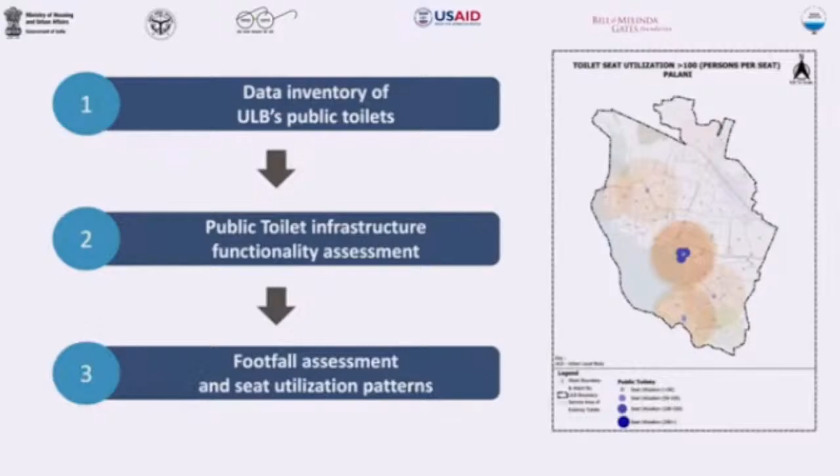Seasons. By additionally geolocating high-activity areas and open urination or defecation spots, new interventions are pinpointed. Finally, citizen validation surveys authenticate proposals to ensure that public toilets are available when and where people need them.

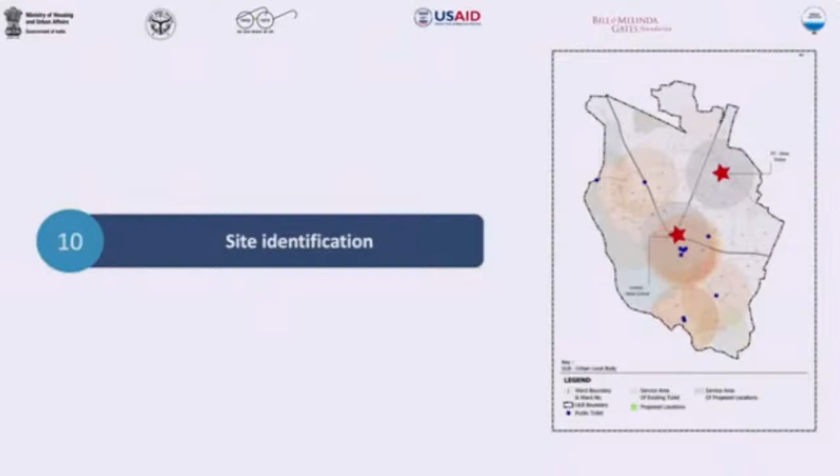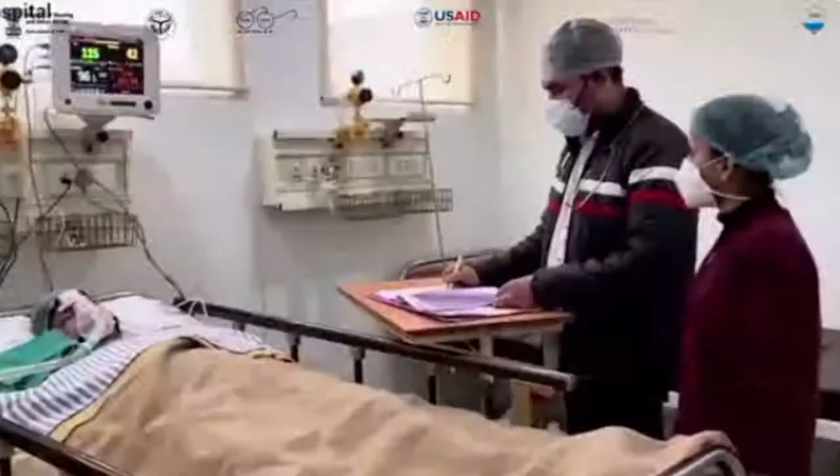Shanti commutes to work by bus, switching at 2 points along her 1-hour journey. Heavy rains worsen her trip, but even on her period, stopping to use a restroom isn't an option. Finding a clean toilet requires a 10-minute detour, risking her chance to catch the connecting bus. Last year, Shanti contracted a urinary tract infection, like countless others who hold in their pee.

Though public toilets have been built in large numbers under the Swachh Bharat mission, ULBs treat their daily maintenance as an afterthought. Supported by BMGF and USAID, WASH Institute has developed a toolkit to streamline public toilet monitoring. Using this toolkit, states can assess public toilets based on functionality, accessibility, cleanliness, eco-friendliness, and safety. Toilets receive a revisable rating, and a dashboard mechanism allows ULBs to monitor them at scale and plan interventions. Public feedback reinforces this process, making ULBs accountable for clean and functional toilet infrastructure.

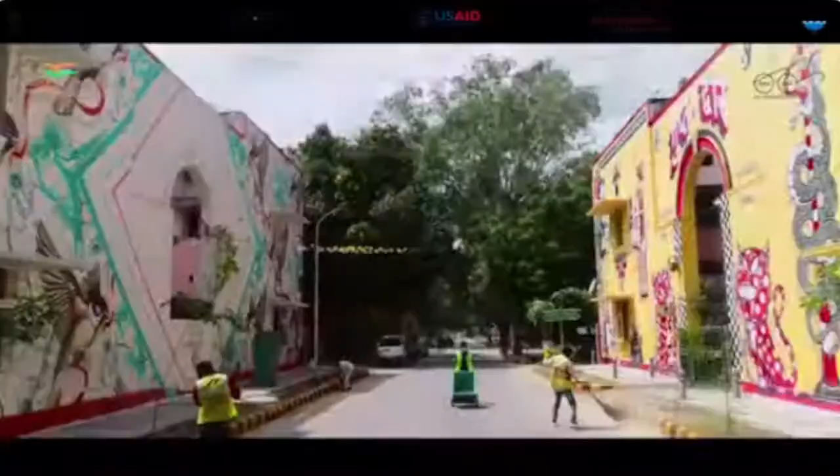In the afternoon session, we move on to session 6, Technology Selection and Treatment Standards. To begin, I first invite our speakers onto the dais.

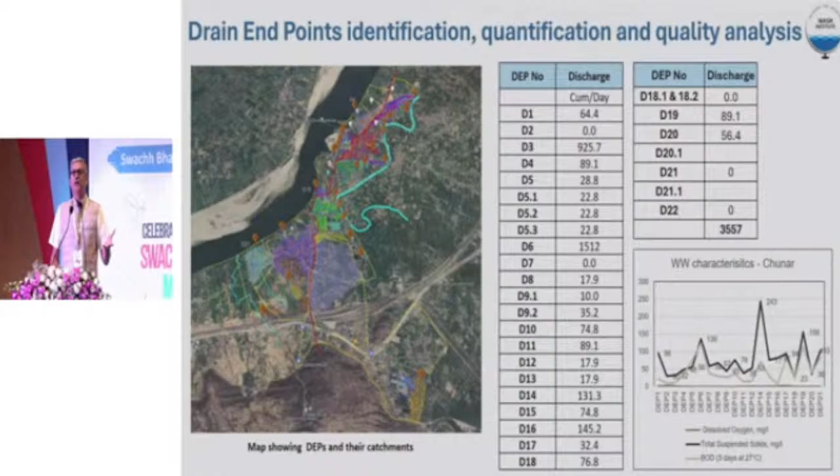But at the end of the day, if you see on an average, from BOD point of view, it is less than 100. In only one of the places it is more than 100; if not, it ranges from 50 to 100. So this is one of the key lessons one has to learn, because most of the time in the morning it was also said that we are designing it for more than 200 or 300 BOD, which is not required.

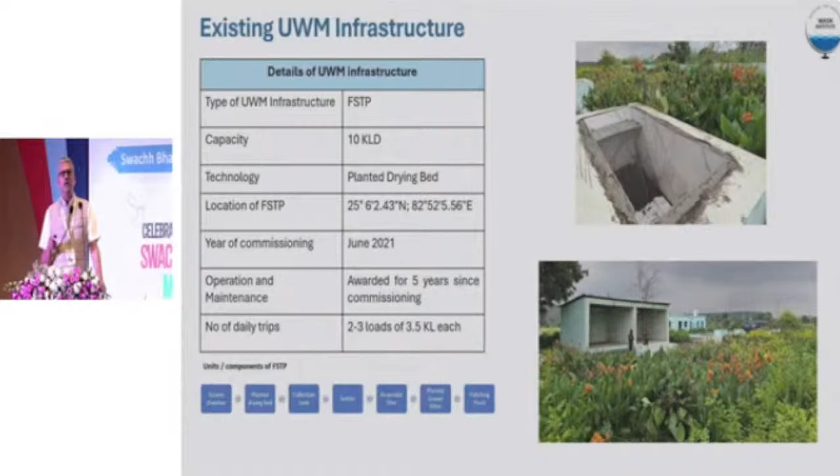Other than that, they had an UWM infrastructure, which was also discussed in the morning. There was one FSTP available with 10,000 liters capacity per day. From the data collected, what we saw was out of 3,800 KLD, or 3.8 MLD of wastewater generated, 3.74 MLD was actually discharged into the drains.

Which means at this point of time, the main intervention is how do you manage the wastewater flowing in the drain. So again, this helps us understand what infrastructures are available, what improvements are required, and what project intervention can be taken up. This helps systematically lead to the solutioning.

The next part, once we knew this, we also checked the risk. This is one of the very important points I wanted to show you, which also helps you select either a sewer system or a decentralized and on-site system. This framework helped us analyze the risk of UWM practice in respective towns.

As we said, in Chunar more than 95% of households got water supply through a pipe. More than 95% of people discharge their wastewater from the septic tank into the drain, and grey water also, more than 98%, goes into the drains, which means water getting into the ground and contaminating the water source is very less.

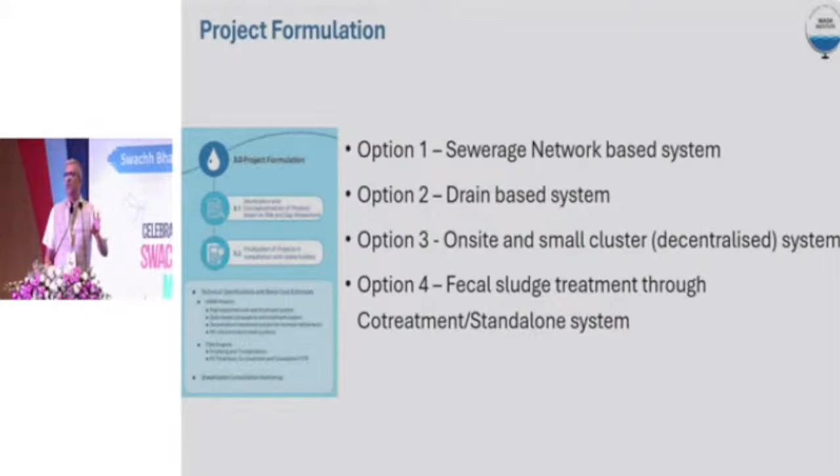Any time we want to talk about used water management, there are four types of solutions: a pipe network, drain-based on-site or small decentralized system, co-treatment of fecal sludge in existing STP or a proposed STP, and a fecal sludge treatment plant. We have to see how these four types of solutions can be integrated within the city's problem. That is what was being tried with this particular method.

So we conducted the detailed topo survey, which is one of the very important parts of the planning process. One should definitely have it, which helps you, especially if you are going with the sewer network or the drain-based network—this is a very essential component. When we did the survey, it was not only the road survey, but also the drain survey. We identified systematically where land is available and to what extent, and also surveyed the water bodies. So these four data sets were collected as part of the data collection.

Once we collected the data, using the topographic data we started working on the planning, where we designed very clearly for a sewer network and checked how much that would cost. From our intervention, there was no requirement for a sewer system, but as an exercise we wanted to compare the sewer system versus the drain-based system and how much each would cost. For that reason, we designed it.

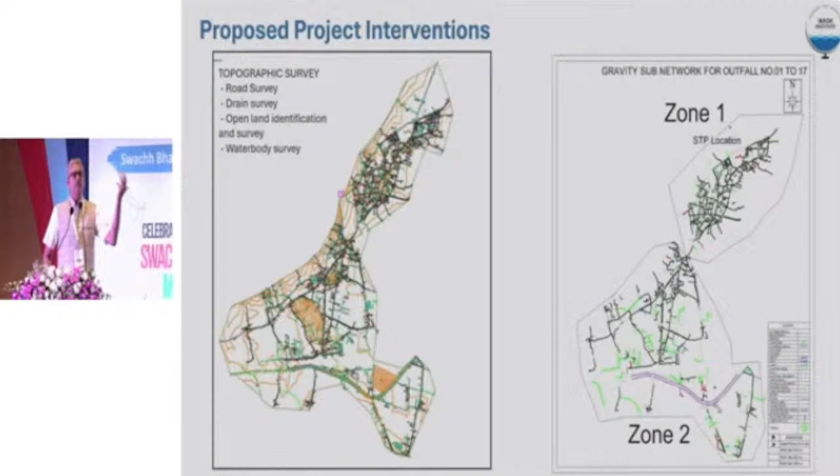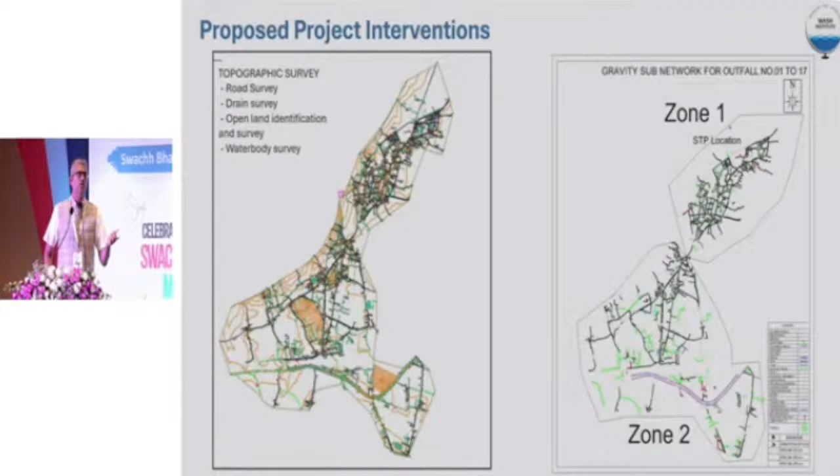But at the same time, comprehensive planning is required for future expansion, because at this point with the resources available, we may go only with an I&D system, but whatever infrastructure you provide for an I&D system today should be usable in the future also. Keeping that in mind, we designed this.

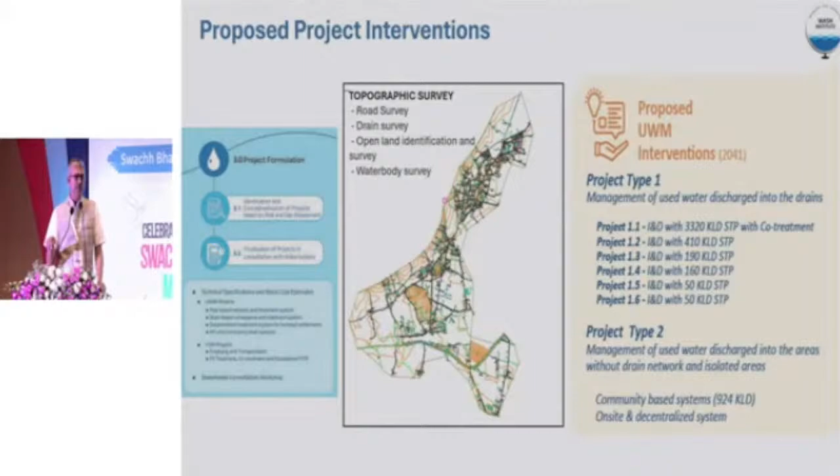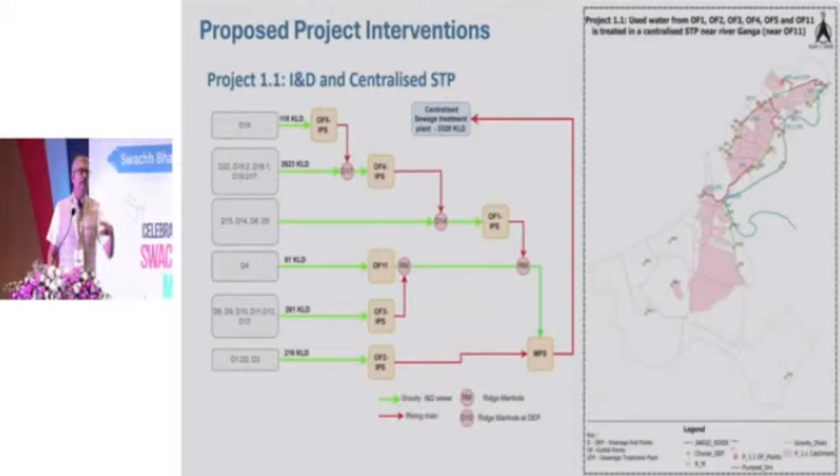These are some of the projects identified across these 22 drains, which were systematically connected. If you see the map with the shaded area, these are where the drains are, systematically connected using the I&D trunk network. The trunk network we designed was part of the sewer network design I showed earlier. So tomorrow, if the city wants to expand, if they have additional resources, they could also provide the pipe in this area.

Wherever we have provided the STP, there we have considered co-treatment. At this point of time, the city has an FSTP and their present demand is met, but for future demand, they have to provide a provision within the STP for co-treatment.

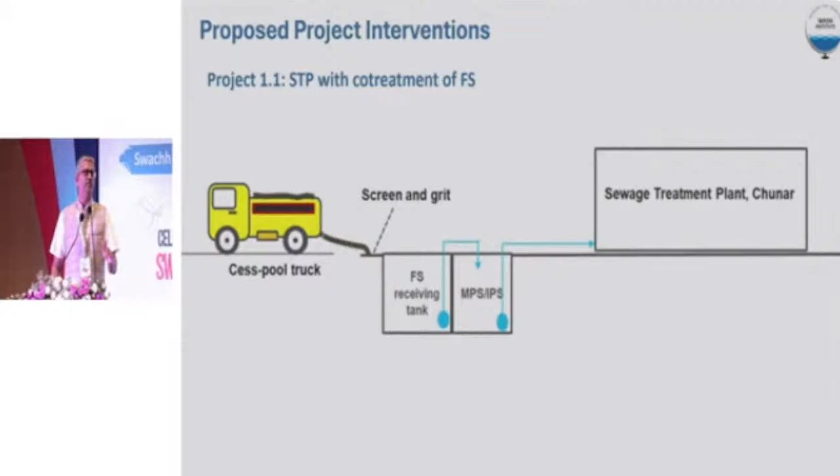For the open areas, there are many areas within the town which are under development now, or fringe areas. There we are proposing a decentralized system or cluster-based system. This has to be very local and site-specific, because we cannot pinpoint it at this point of time. It needs a detailed local survey, and then we decide which can be a small decentralized wastewater treatment system, or community-based pits like a leach pit or soak pit, or other on-site systems that are proposed.

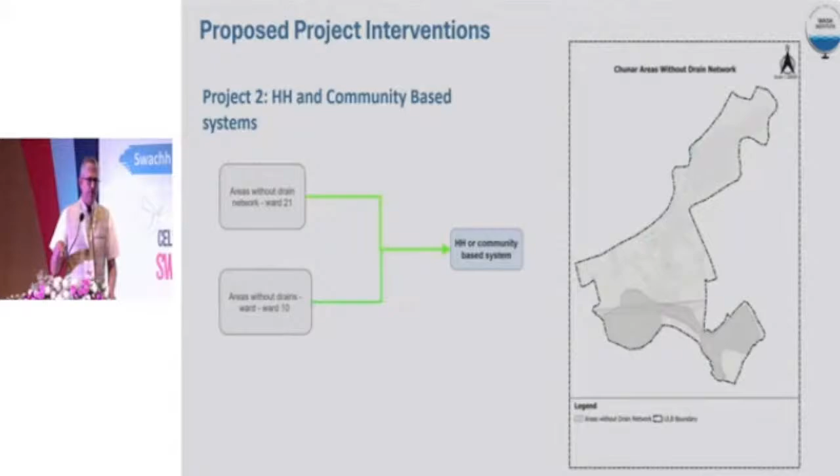Overall, these are the components of the different projects under the main project. As I said, the first project was a drain-based solution. Under that, we have listed 6 projects. The first one was the real project, where we have pipelines connected to a centralized STP. All the others are decentralized STPs, because there are small drains going here and there with a very small amount of wastewater, which we didn't want to divert elsewhere. We wanted to treat it there only.

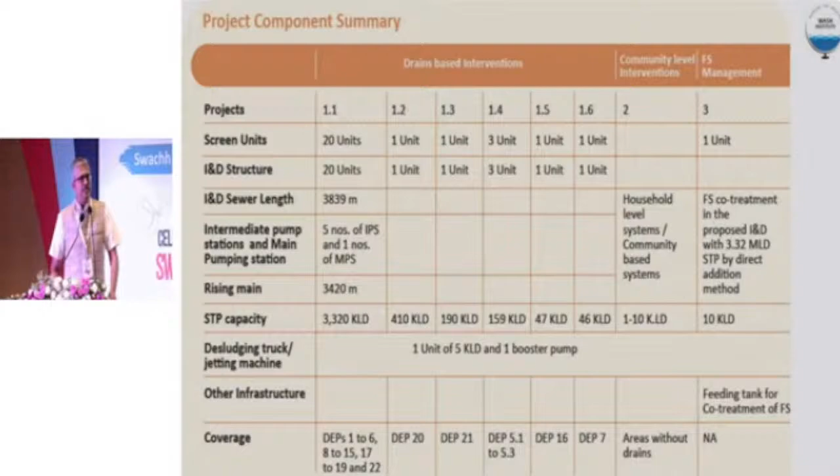Along with that, as we said, the planning process is in place, but at the end, one also needs to select the technology. So we have created a pool of technology options, as one of my other panelists will also talk about, for nature-based systems, on-site systems, and conventional systems.

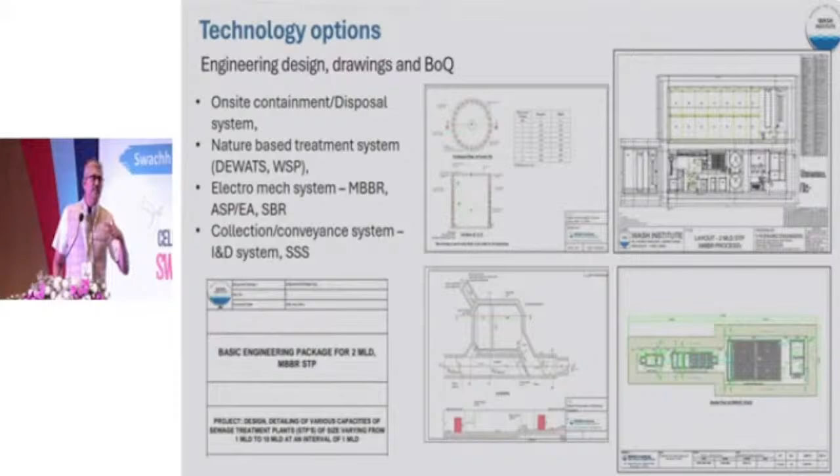For different capacities, the technical options with detailed design, description, cost, and bill of quantities have been developed so that the city can also use it. They don't have to develop it from scratch. They can use it and see how it can be adapted for the local situation there.

From experience, we have also developed detailed training modules, which are e-learning modules, more than 38 for each component. For example, if one wants to learn how to measure wastewater in the drain, we have developed a video-based module which helps the towns do that exercise. Likewise, around 38 e-learning modules of different components of the planning process are available, and we are happy to share them; it is already available on the website.

Other than that, physical training modules are also available. These are the annexures. For doing each exercise, we have annexures and tools available, either a digital tool or a survey-based tool, which can also be used.

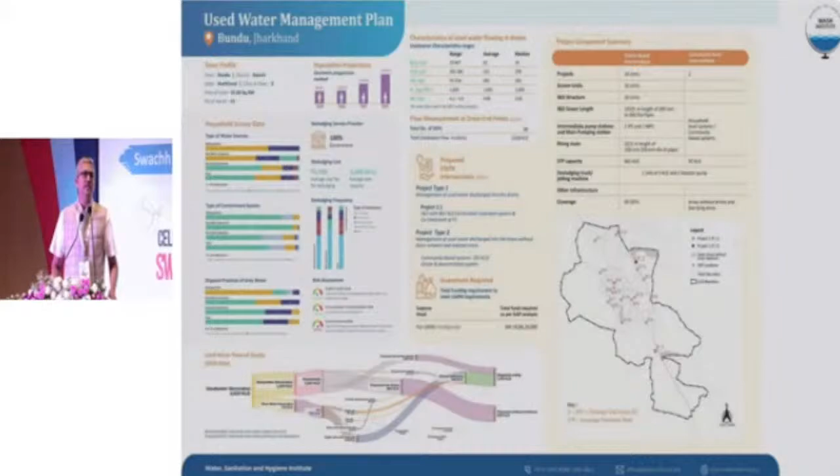Similar to this, there are two other towns we worked on. I'm not going to talk about those; they have been exhibited in the exhibition hall. You may please visit there to get all the information related to the other two towns. Out of 9 towns, 4 have been exhibited in the exhibition area. I was talking only about the town of Shunar. Thank you very much.

At the same time, whatever methodology I have described, we have also developed a small booklet. All of you can use this, which will guide you to prepare your used water management plan. We are happy to share it with you all. Thank you very much.

Thank you, Rajesh ji. So in the morning session you saw one model DPR based on analysis from Chhattisgarh. This is another example, and as JS mentioned, we will collect all these things on a knowledge platform so that each one of you can get all information at a single point. With this, these training modules and whatever they have prepared will also be connected so that you take maximum benefit of it.

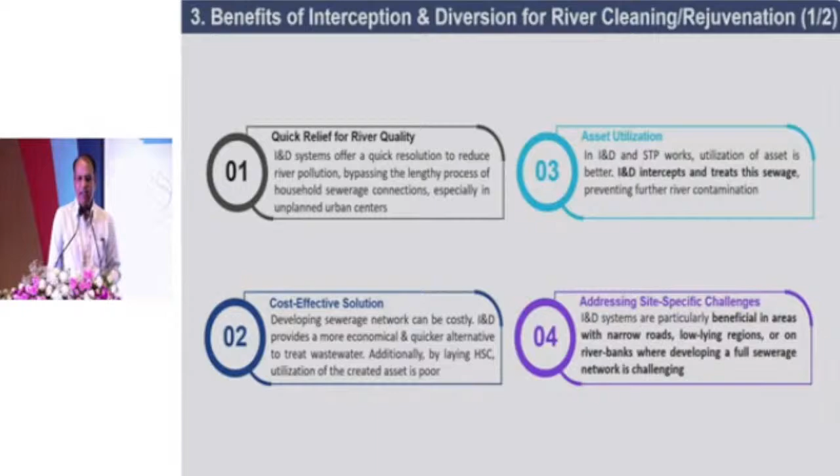Coming to what are the benefits? As I said in the beginning, every system has its own merits and demerits, but there are certain advantages, and that's why I think when the group of secretaries were drafting the framework of Namami Gange, they chose I&D and STPs.

The first is quick relief, because you require minimum interventions. You just have to tap the drains. It's cost effective - Rajesh was trying to share the data on how much expenditure would be required if we go for a sewerage network.

The third is asset utilization. It's not that in Namami Gange we are not doing sewer network projects - we have about 40 odd projects with sewer networks. And this is our experience: the asset utilization is probably 20 to 30%. Even after 4 or 5 years of STP construction, the asset utilization doesn't improve because of house service connections and other issues.

This is totally reverse in I&D. Probably on day one, you'll get 70% asset utilization.

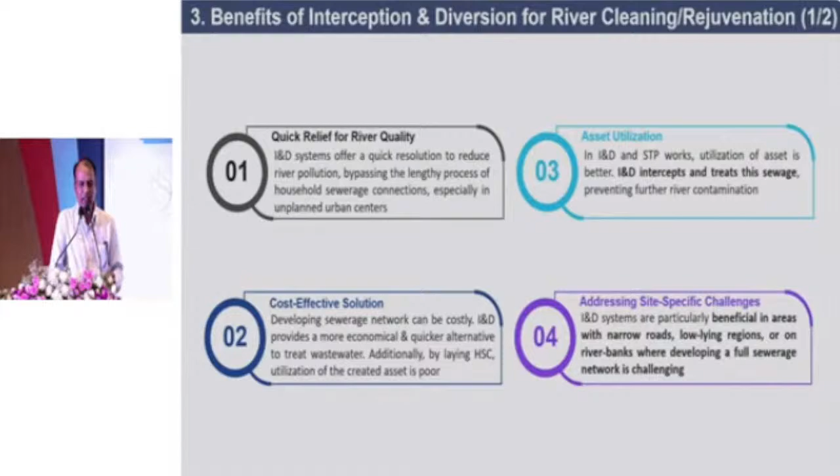Site-specific challenges, of course - whenever you have to lay sewer lines, in urbanized areas what type of challenges do we face? There are certain historical old towns where we don't need sewer networks, because if we see the boundary, the road is hardly 2 to 2.5 meters. We have such experience in some towns of UP and in some old towns of West Bengal also.

Sure, like old Dutch colonies from that time, so we don't have space to lay the network in those areas. The other thing is prevention of solid waste - not that the entire city's solid waste, but whatever floatables and other things are going through the drains to the river, with a better I&D system we'll have proper screening and other mechanisms.

They'll keep saying this nala is still flowing, whatever are you saying? Same with regulatory compliances, because nowadays with awareness and other issues, this is becoming a challenge, and most of us are daily getting orders from honorable NGTs and other courts saying, this nala is still flowing, what are you doing about it?

In UP, the state has done very well - they are taking STPs under Namami Gange scheme, I&D sewers under Namami Gange schemes, and pumping stations, which of course are located at the lowest point. Later on, through AMRUT and other programs, they are laying sewer networks, so slowly they are converting the I&D sewer with the sewer network. So it is part of a holistic approach.

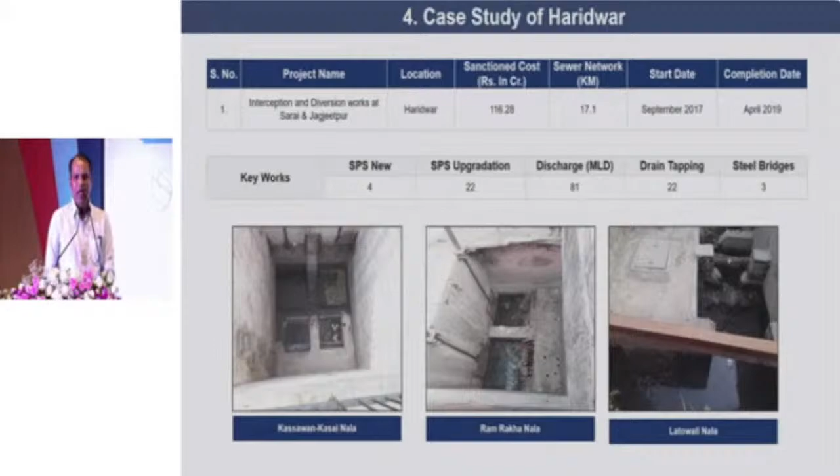This is one case study I thought I'll present - Haridwar, wherein there were 22 odd drains which were outfalling into the river Ganga. Within 18 months, all 22 drains were tapped. STP capacity was created, and there was not a single drain outfalling into the river Ganga. So one problem is solved. Now under the other funding, KfW, they are probably going for the sewer networks and other things.

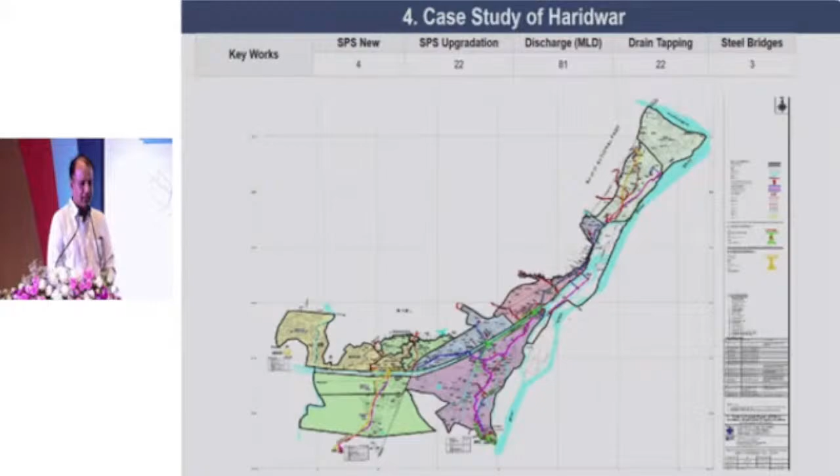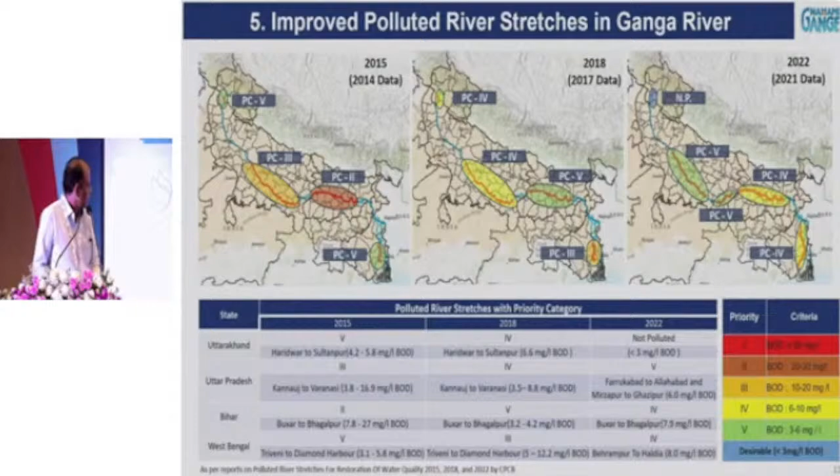As I said, many of the projects have completed, and we are in the 8th year of the program, so what are the outcomes? We tried to compare the water quality with respect to one particular parameter, BOD, and how it has improved in all 4 states. This is a brief of that.

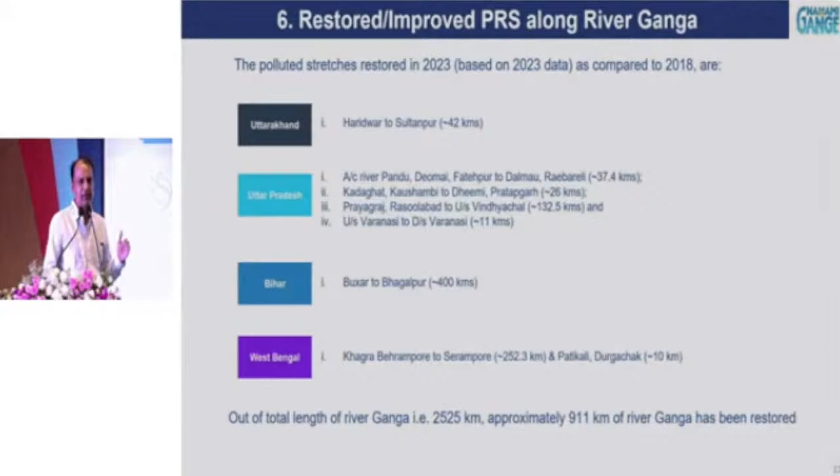Now, this is the same outcome explained - compared to 2018, the water quality has improved in all the states. So fixing on one particular parameter is showing how your investments are yielding results. This is again an interpretation of the data. I know I'm running out of time. Thank you, sir.

Thank you Praveenji, thank you for enlightening people. Now I will come to the third one - this presentation on standards that has really been creating confusion in deciding technology and framing DPR, and consequently land and other issues. I find that some cities have not been able to move forward because of confusion, and somewhere cost has also been going up because of technology selection and other factors. So I will be presenting on treated effluent standards that will make clear to some extent how we should go about it.

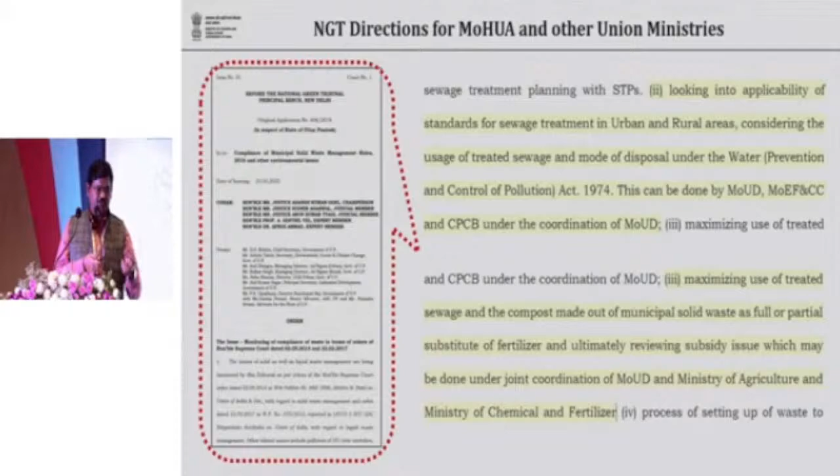Keeping this requirement in mind, in spite of their direction, Honorable NGT has been very focused, and they have directed Ministry of Housing and Urban Affairs, Jal Shakti, and also Environment Forest to look into the applicability of standards for urban and rural perspective. Mr. Praveen knows such initiative is already in the ministry - one meeting was held last year in November under chairmanship of secretary, and additional secretary held one meeting last month on 25th October on this, and our ministries are deliberating how to evolve a graded approach that will suit villages, small towns, big towns, and polluted stretches also.

So this discharge standard. And another thing is, when we talk about moving towards circularity, what should be the ecosystem, so that whatever we treat, to what extent it will be used for different types of crops, horticulture purposes, and even road application, discharge application - all are different. Treating everything to a very high standard and then using it is sometimes counterproductive rather than helping. So we have to examine these aspects, and keeping this in view, we examine what is going on around the world. Those things also I will be presenting.

But before that, I would like to bring up that in 1986, this was the standard that most of you are aware of. But after that, the norms notified by MOEFCC in 2017 specified 20 BOD for metro cities and capital cities and 30 for others.

But unfortunately, some people went to court and argued that the entire environment is degrading. So based on that and some other discussion, this 10 BOD and other standard came from NGT. There was also a requirement that MOEFCC should notify within a month, but that was not done. And again the central ministry went to the Honorable Supreme Court through a civil appeal.

So this is also an ongoing issue, because these standards are often not applicable or practical in the field. Otherwise everybody wants to go to a very very high standard, but what is the need for that, and why should we do it to that extent in every case? Let us say in coastal areas like Mumbai and others, there's a lot of dilution because of the sea. In that case, if we are treating to 10 BOD, it will simply be a wastage of resources.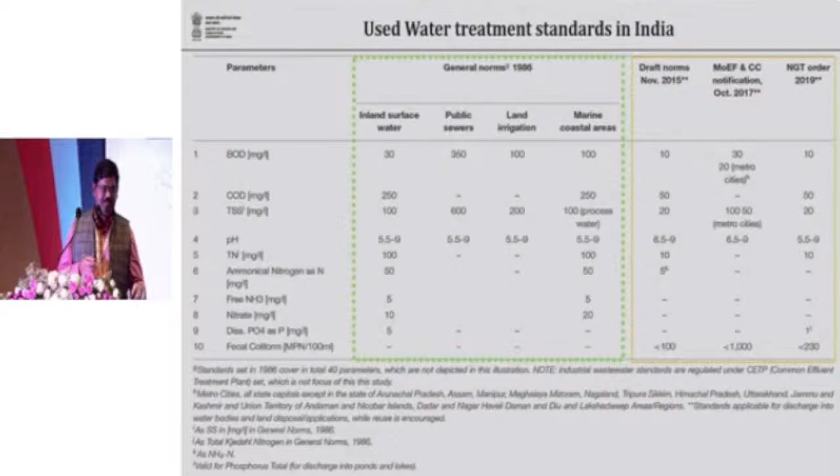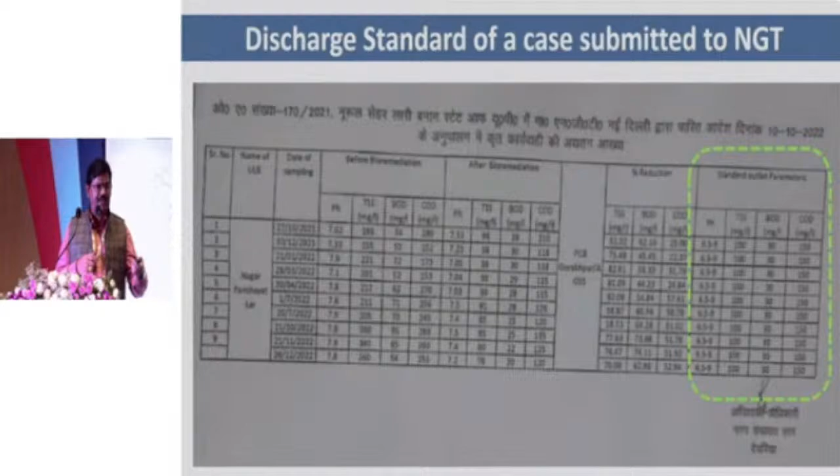This morning I showed that even in the case of NGT, this sort of confusing standards are there. So I wanted to discuss and clear this confusion, so that while framing a DPR for a smaller town, there should not be any more confusion.

If you see different states, they are following these standards differently. This morning I also showed - somebody is having 30, somebody is having 10, and somebody is having 20. This sort of standard is accepted by their state pollution control board. If really BOD 10 and whatever NGT has directed has to be there - it's been 6, 7 years - all should have been brought down to less than 10 BOD, but that is not there. So this means designing everything totally around 10 BOD is not fair.

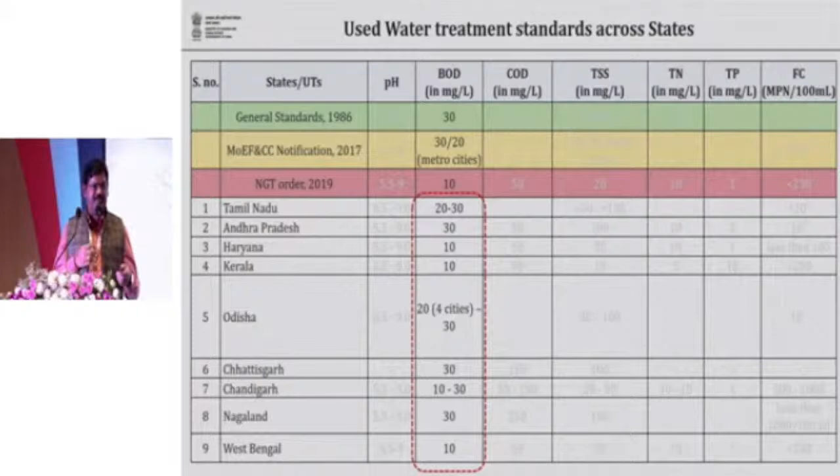Similarly, if you see in case of China and the EU - European Union - they are in a temperate climate. We are in subtropical climate. In our case, all this biodegradable material degrades very fast. But in case of Europe and colder regions, it takes a long time to degrade. They are using BOD 25, but in our case it is 10.

Even in the case of China, only around Beijing in some areas and some core urban areas is it 10, where it is in critical stages. Otherwise, most areas use Type B, BOD 20, and secondary BOD 30. Even in spite of that, for villages, another set of standards exists for all their states. So if, just like India's population size, China is doing it like that with a huge population, we have to provide facilities like that too.

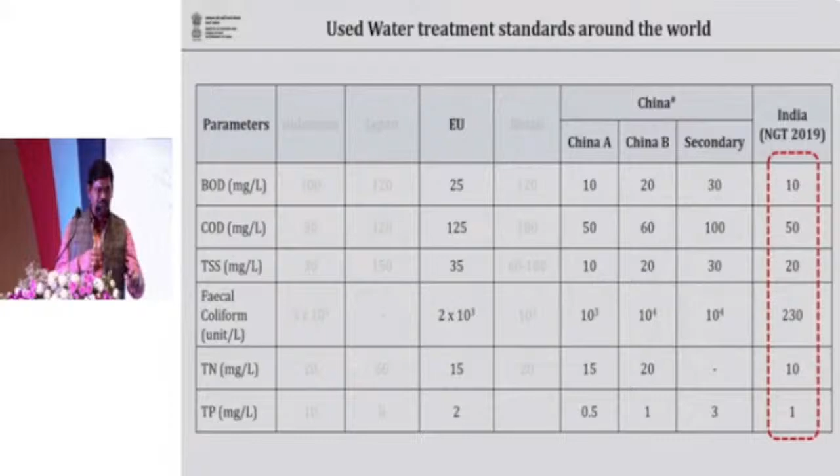In that case, if you don't judiciously utilize treatment technology and treat to a level, it will result in wastage of technology, wastage of power, and also whatever nutrients we are importing - urea and others. On one hand we are importing and giving huge subsidy, and on the other hand we are removing those nutrients and throwing them in sludge. So these sort of things we have to economize. It's only application of mind, and through a proper ecosystem it will result in huge saving of funds, and the challenges we are facing at this moment will be resolved to a great extent.

This is another thing I would like to mention - if we are removing BOD from 30 to 20, only 4% reduction is there, but 50% of our sewage is going untreated.

Their BOD is 200, 250. So if at all we are serious, and anybody is serious, let us at least provide primary and secondary treatment to all first, and then go for secondary and tertiary. But what is happening, in the name of these higher standards where STPs are there, funds are being quickly utilized to upgrade that without giving much benefit, and in other places it is going untreated. So that aspect should not be there.

We have to properly see that untreated sewage is also treated, where the gap is more than 50%, and in many cases even higher-end technology capacity utilization is also less. So those aspects we have to collectively address and raise in whatever forum required, so that a solution, if not today, in 1 year or 2 years, this solution should come.

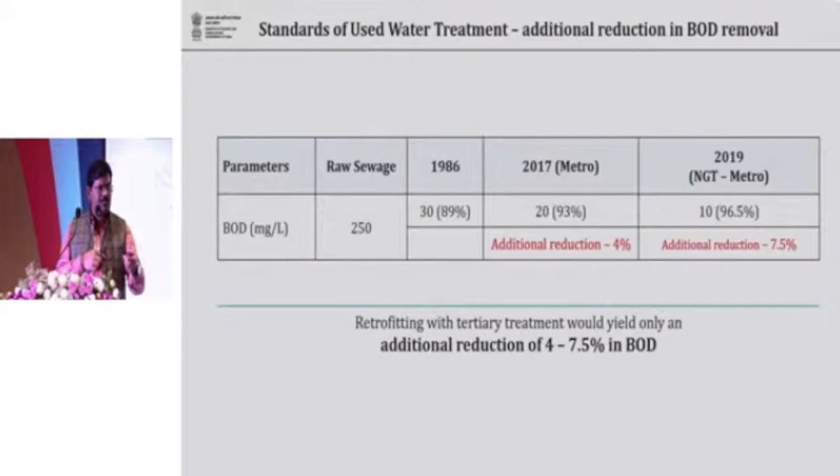Similarly, if you see cost variation also, there is huge variation here in case of Capex technology-wise, that is also costing a lot based on technology selection. And if you go for tertiary treatment, the cost per MLD is very, very high, and O&M is also very high.

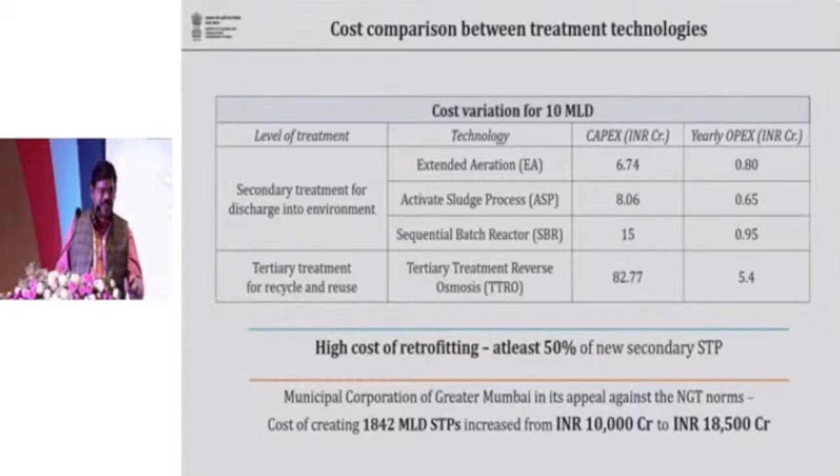So policy is also another important thing. Most of these states, 12 or 13, they are telling that we will be utilizing 60%, 70%, 80% of treated sewage. But if the given standard is not conducive to irrigation, not conducive to water discharge, or for pond rejuvenation or sea disposal, then how will they be able to utilize it? It is not possible to utilize all of it without this proper ecosystem, and whether for agriculture, domestic, firefighting, or groundwater recharge, these things should be collectively developed and then decided. That will help a lot, this sector and also the country.

Reuse standards I will be taking from some countries. If you see in Jordan, they require a lot of these things for cooked vegetable parks and playgrounds. For BOD they are taking 30, and for fruit trees and others it is 200. Field crops it is taking 300. In case of Palestine also, similar differential use-based standards are there. In case of China also, vegetables, cereals and others, it is less than 40. Cereals cultivated on dry farmland, 60, and in case of fiber crop it is 100.

But in our case everything is less than 10. So that is one area of concern. Here sometimes I would like to highlight: in case of Israel, some people counter that in Israel it is 10, so why not go for the stringent one, why are you suggesting otherwise. Here, their problem is not the standard. Their problem is drip irrigation.

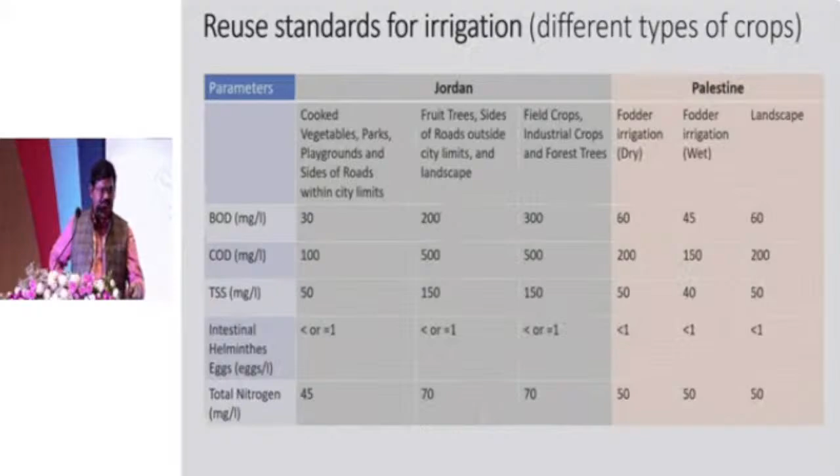So these are 1-2 more examples. Egypt has given in great detail what are the different grades and in different cases how to do application. And the suggested quality we are telling, in case of marine, let's say normal case, for more than 10 lakh city, BOD can be 30, and then for cities less than that, and in case of 1 to 10 lakh, less than 50, it is for marine.

Even the additional secretary mentioned, don't differentiate, let it be 100 when it is going to be put in marine after primary treatment. So these sorts of things we can utilize, and a huge fund can be saved, O&M can be saved.

And the same thing in the NMCG directive that came in January - there also it says discharge standards should be as per the Act, they have not mentioned NGT. So all these areas are telling that especially for a smaller city, with no confusion, go for this BOD 30 wherever required, unless some specific use is there. And in parallel we are making efforts - if anything comes up, collectively we will try to resolve it, but because there is a lack of clarity, we should not be in a dilemma and delay this type of project.

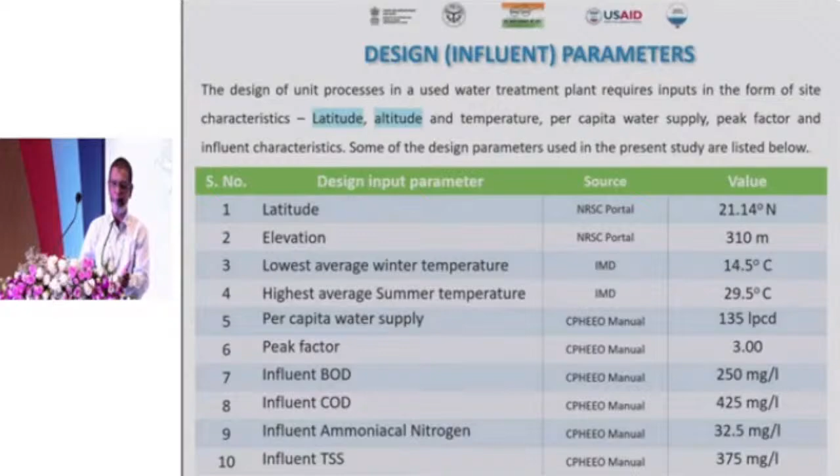The peak factor and the influent BOD and COD have seen a lot of discussion so far. We chose the effluent BOD as 30, but the influent BOD has been kept at 250. When designing for grey water, the BOD is only 150, but when you go for co-treatment, that adds another 50 or so BOD, bringing it to about 200 to 225. With that view, we have taken 250.

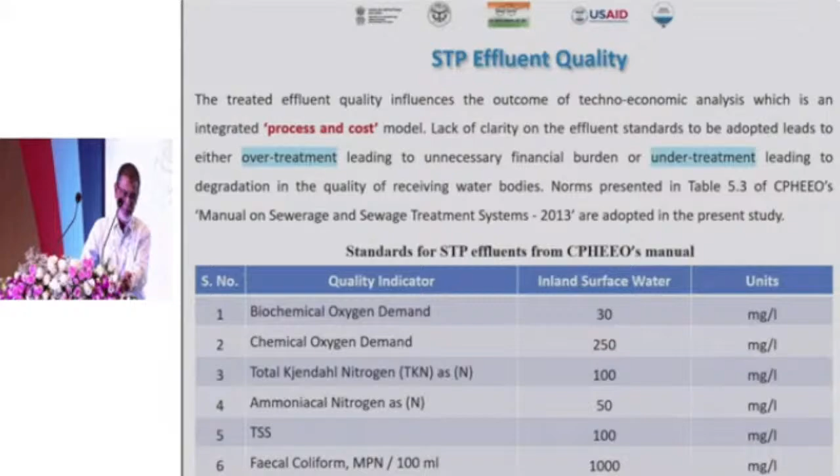The effluent standards, as discussed by Chaudhary just now, we have taken as 30 for BOD and 250 for COD and so on. These are not varied.

The design components include common components like wet well, coarse screen, medium screen, grit chamber, secondary settling tank, chlorination tank, and a primary settling tank required only in the biotower. Bioreactor design is based upon the CPHEO manual, which is our first preference, or the advisories released by CPHEO. If these do not cover the technology, we go for Metcalf and Eddy, a standard textbook, more or less a Bible for wastewater treatment processes.

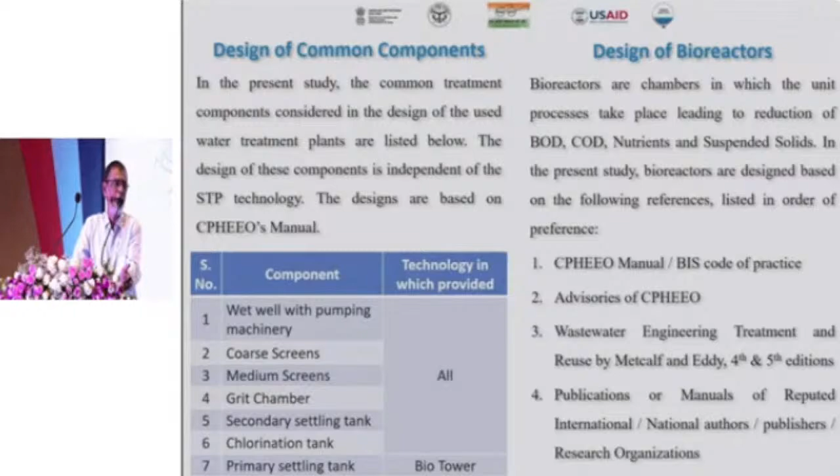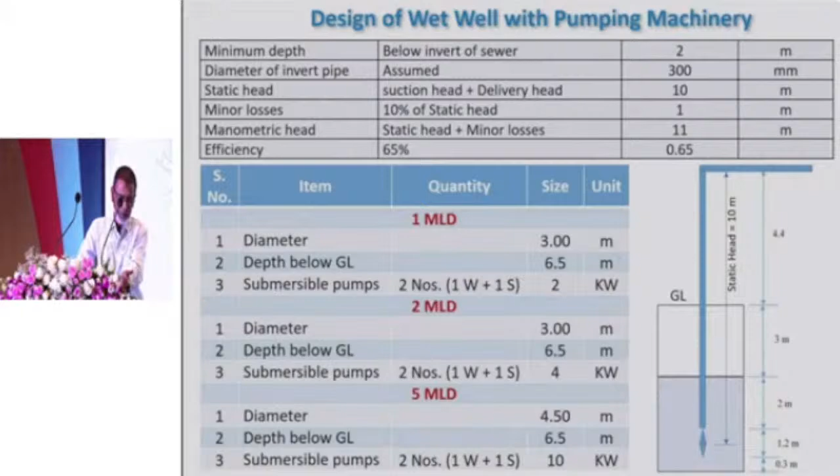The wet well design, as you can see, is done for 1 MLD, 2 MLD, and 5 MLD. The diameters and depth are taken as 6.5 meters head, and the pump sizes obtained are 2 kilowatts, 4 kilowatts, and 10 kilowatts for 1, 2, and 5 MLD respectively.

I'm showing you a waste stabilization pond, which consists of a wet well with pump, coarse and fine screen chambers, grit chamber, then anaerobic pond, and facultative pond, which requires only desludging with no aeration required. This is a nature-based process, followed by a chlorination unit.

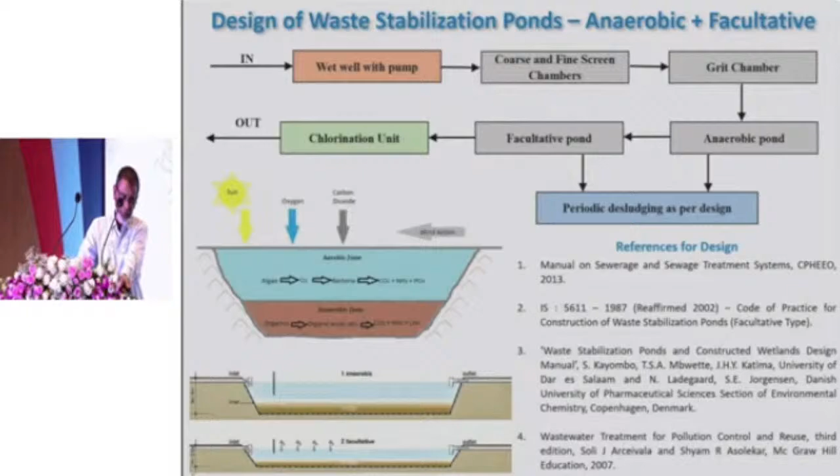The references are again the CPHEO manual as well as IS 5611. This is the basic design: 250 mg per liter BOD in, 2 days HRT for the anaerobic pond, BOD out is 127.5. This goes into the facultative pond, with 2 primary facultative ponds and 1 secondary facultative pond. If you want, you can also add a maturation pond after that, in which fisheries can be undertaken.

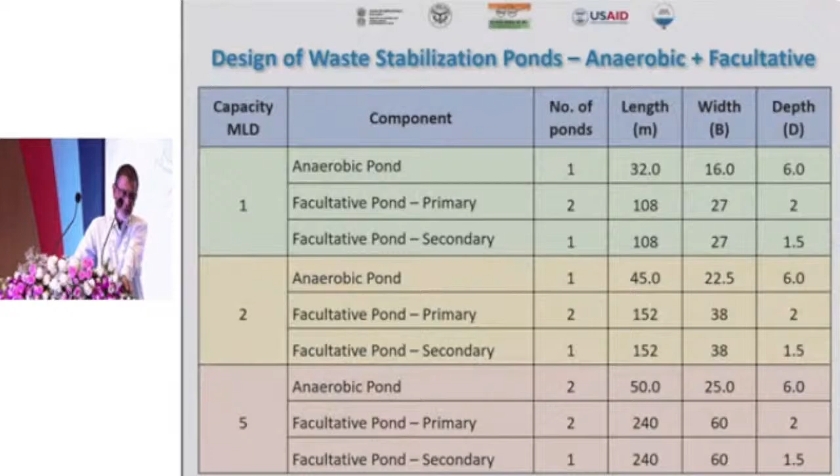This is the size of the various units. This way we are designed. One thing I would like to point out is all our designs, the area estimates, are based upon the actual layouts. We have not just taken the size of the tank, but we have placed all the tanks, prepared a layout, and the whole area of the layout has been considered here.

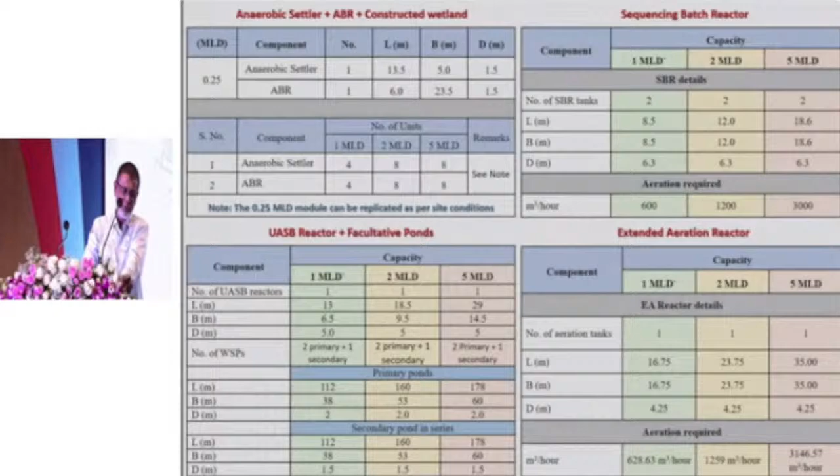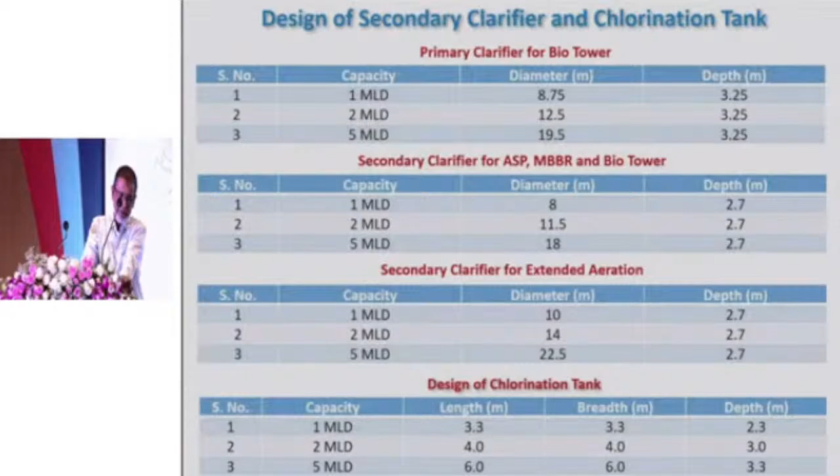So different technologies we are taking, you can see the layouts over there. And this is for the biotower. Then we have the primary clarifier, secondary clarifier, and then chlorination tank and so on. All these designs have been done.

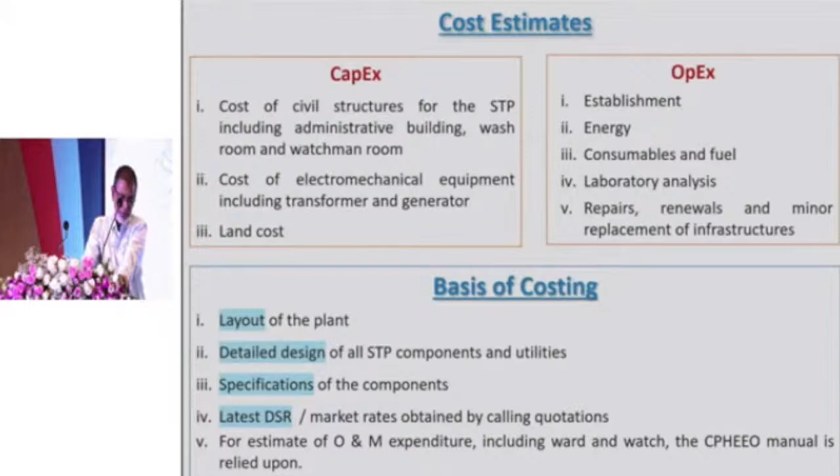Then comes to the cost estimates and basis of costing. The capex we have taken is the cost of the structures, electromechanical equipment including transformer and generator, and the land cost. In OPEX, we have taken establishment, which is the manpower as per the CPHEEO recommendation, then energy cost, consumables like chlorine and polymers, and fuel for the generator, laboratory cost, analysis cost, then repairs, renewals, etc. The basis of costing is layout of the plant, detailed designs, specifications, latest DSR, and market rates when they are not available.

So for these 10 technologies or combinations, we considered 3 STP capacities - 1 MLD, 2 MLD, 5 MLD - and 5 land costs: zero, meaning government land is available and you don't pay anything, or 25 lakhs per acre, 50 lakhs per acre, 75 lakhs per acre, and 100 lakhs per acre. These are the 5 land costs we have considered.

For the life cycle cost analysis, we took a 15-year period. Energy cost is 8 rupees per kilowatt hour, 10% per annum is the interest rate, and escalation is also taken as 10%. Then this is the outcome that you see over here.

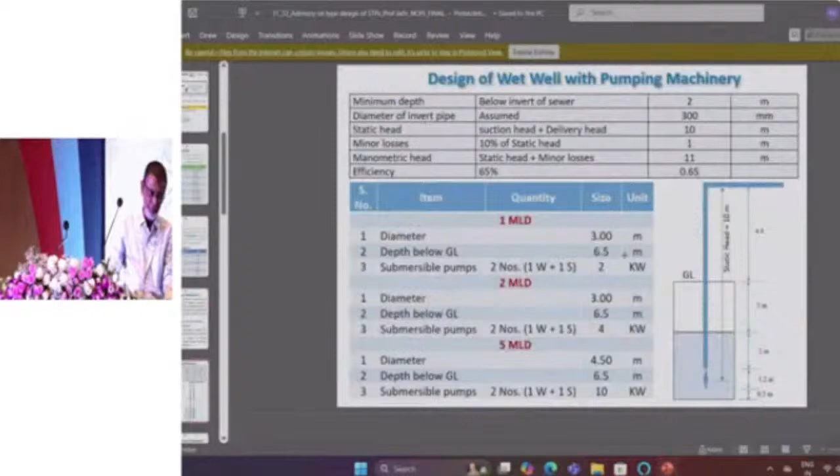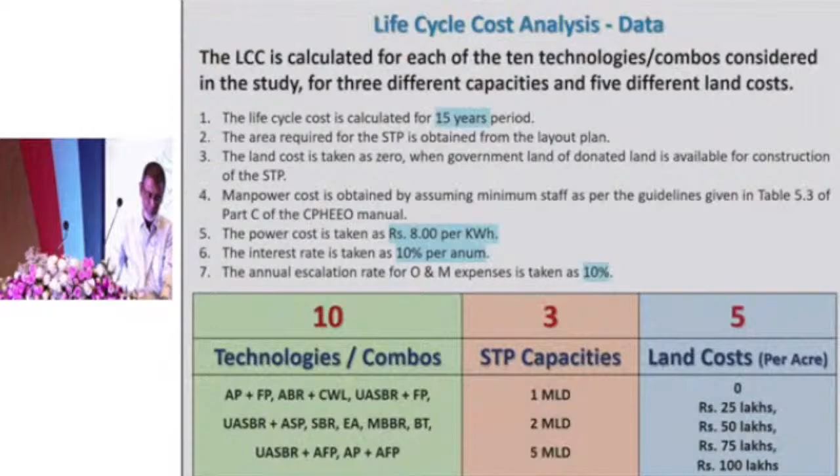Thereafter, for 1 and 2 MLD, beyond 50 lakhs, biotower has emerged as the least life cycle cost. And then for 5 MLD, we are having SBR and other technologies. So for small towns in SBM2, as many speakers have already said, we prefer waste stabilization pond if area is available.

Thank you, Professor Jaffrey. This analysis is very, very important in the sense that they have come out with how, if we are going to purchase land, the economics will change. Even if you are purchasing land, we are still finding that we can safely have those nature-based technologies which are less mechanized for a smaller town.

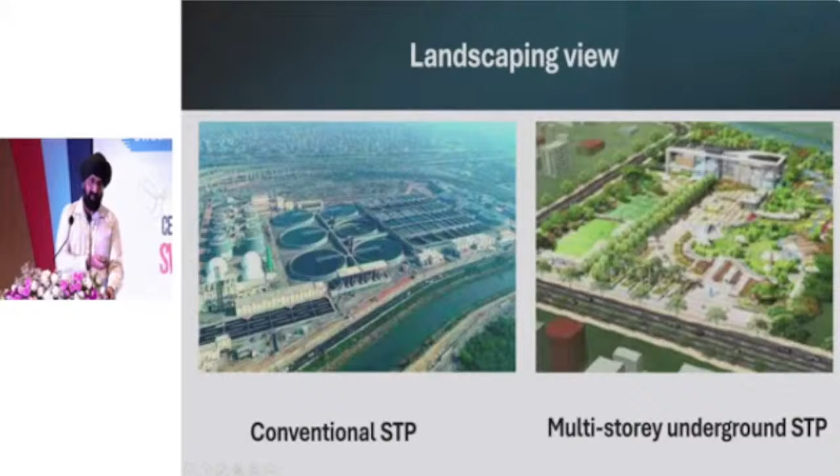Then comes the objective of the feasibility report. In our mind there is a doubt regarding multi-story STPs — a myth about whether this process will be feasible, whether we will get desired results, and whether it will be too expensive compared to conventional technologies. So we have released a report on the feasibility of multi-story STPs particularly to answer these questions.

So the objectives are: to provide guidance on the feasibility of multi-story STPs, to compare land area and cost, and to assess operational performance — whether we are getting results as per the norms. These are the objectives of the study.

This is not a new technology; it is already an established technology. A number of countries have adopted it. In India we have very few multi-story plants — one in Rishikesh, another in Pune Cantonment, then at Delhi, and coming up is a mega project in Dharavi, Maharashtra, Bombay.

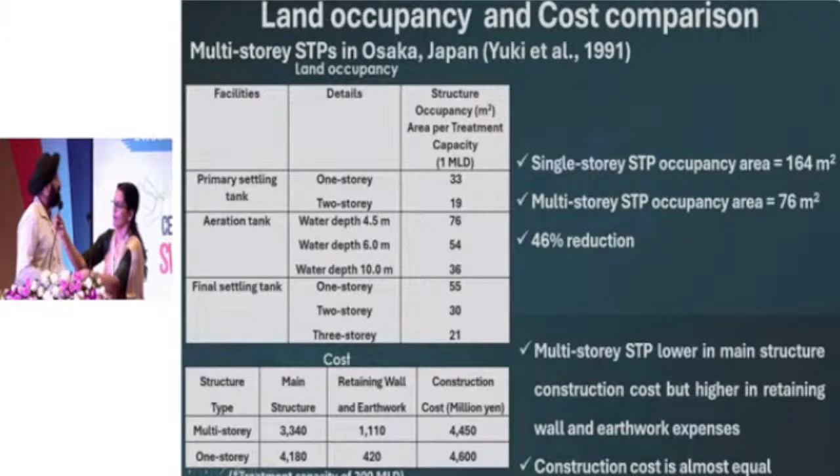I have covered a few scientific case studies. The first is the older one, based in Osaka, Japan, conducted in 1991, using the activated sludge process (ASP) technology. In that study, they proved that a conventional single-story STP covers 164 square meters, while a multi-story design, with one tank over the other, reduces the area to 76 square meters — a saving of about 46%.

This also covers land occupancy and cost comparison. In multi-story STPs, the main structure costs less, while in single conventional story plants, the main structure costs more. But multi-story plants need additional support — retaining walls and earthwork — so these two factors get equalized, making construction cost almost equal. This study proves this.

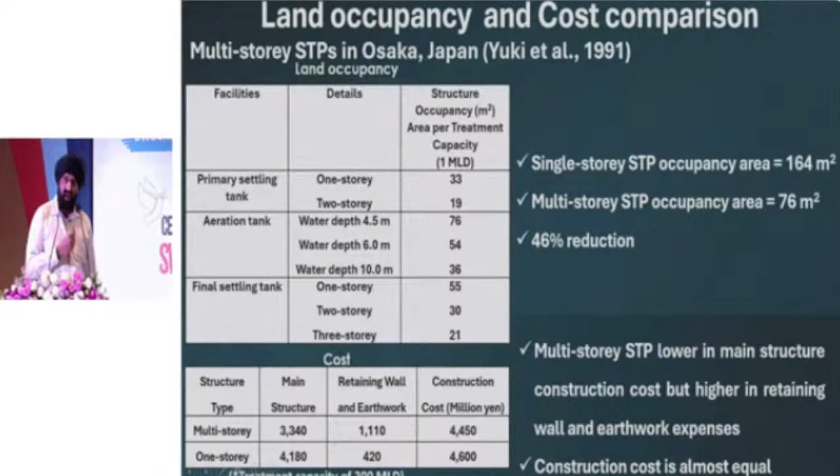Afterward, I searched out a treatment plant at Pune Cantonment Board, Maharashtra, with a capacity of 20 MLD, and compared it to a conventional sewage treatment plant of almost the same capacity based on the same SBR technology. Cost-wise, there was only a marginal difference, but area-wise, it was almost doubled. This I proved out.

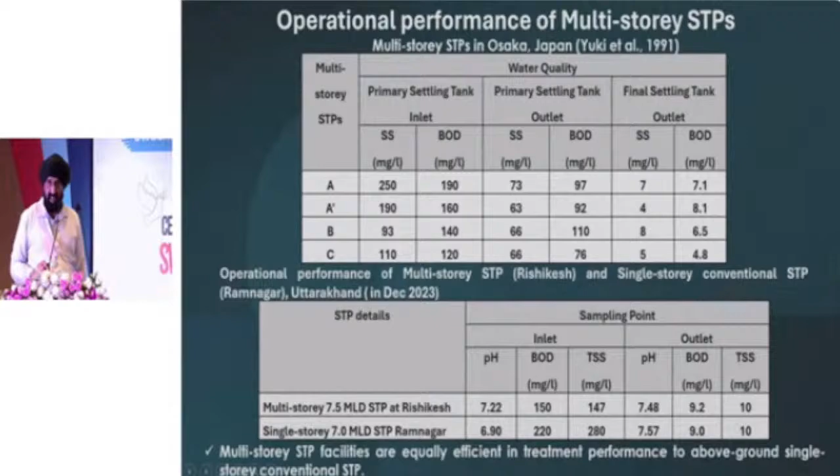Regarding operational performance of multi-story plants, from these studies I got results that are under permissible limits — one from Osaka, Japan, and another from the multi-story plant at Rishikesh, Uttarakhand.

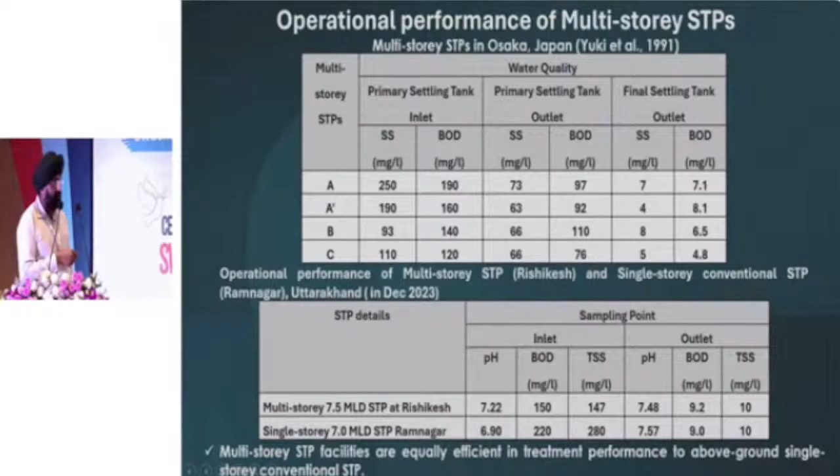So in conclusion, we ultimately have to move to this new technology. It is already feasible, and other countries have adopted it. We just have to go for multi-story plants, as we are facing a dead end particularly in metropolitan regions where land scarcity exists. Thank you.

Thank you Bhalla ji. The message is clear: the moment we go from single storey to double or triple storey, area reduces and overall cost remaining same, so it effectively saves land. This can be taken especially for larger towns where technology is high-end and footprint is less. It will not be feasible for all those nature-based and other technologies.

So after this, the last presenter is Sri Sanjay. He will be presenting about greenhouse solar dryer. The problem we are facing in case of sludge, and also in coming days with compost, is that moisture content is high and pathogens are also high, which makes it unfit for use. He will explain how using this greenhouse solar dryer we can raise temperature to a level so that pathogens get inactivated, making it more useful and acceptable to users. Please, Mr. Sanjay.

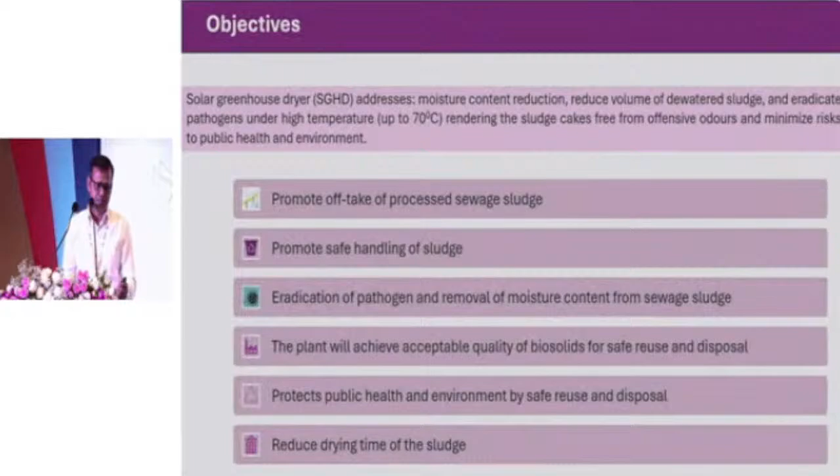First of all, we should know what are the issues with sewage treatment and sewage sludge. The biggest issue is the high cost of handling and transportation because of the high moisture content. It has health hazards because of the pathogen content, and the conventional sludge drying beds take a longer duration of drying time, with less acceptability due to the odor, moisture content and pathogens. So all these issues have been addressed in this advisory - this is the basic objective of this advisory.

The basic principle of a greenhouse dryer is very simple: evaporation of water from the sewage sludge, which is determined using solar radiation, humidity and temperature. This can be enhanced by increasing the area of heat capture, which increases the rate of evaporation, and also by exhausting the saturated air using turbo ventilators and vents. The humidity and temperature inside the solar greenhouse dryer is monitored and controlled on a real-time basis through sensors, removing humidity and hot air out of the solar greenhouse dryer through ventilation and exhaust fans.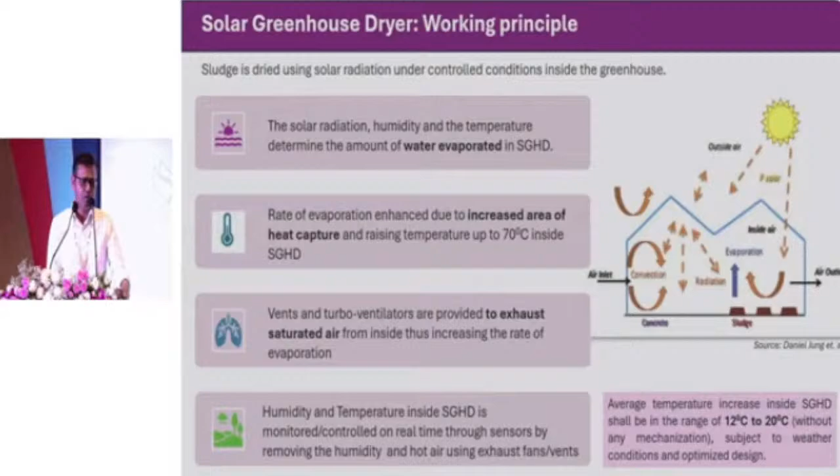To achieve this, it is very important to design the solar greenhouse dryer effectively and efficiently. The orientation is also very important - it has to be kept in an east to west direction to absorb maximum sunlight. Parabolic shape also enhances the transmission of solar radiation and reduces wind load. Multi-layer polycarbonate sheets with UV coating on both sides also enhance the efficiency of solar radiation and capture heat inside for a longer duration. The height of the solar greenhouse dryer shall be kept at 2.4 to 3 meters at the center point to get maximum solar radiation and maximum efficiency.

All the greenhouse dryer shall be sealed properly to reduce thermal losses, and a solar PV module is to be installed to operate the exhaust fans during the daytime.

We have calculated the tentative area required for a 10 TPD plant. The sludge height has been assumed as 30 centimeters, and the temperature has been considered at 45 degrees centigrade inside the greenhouse dryer.

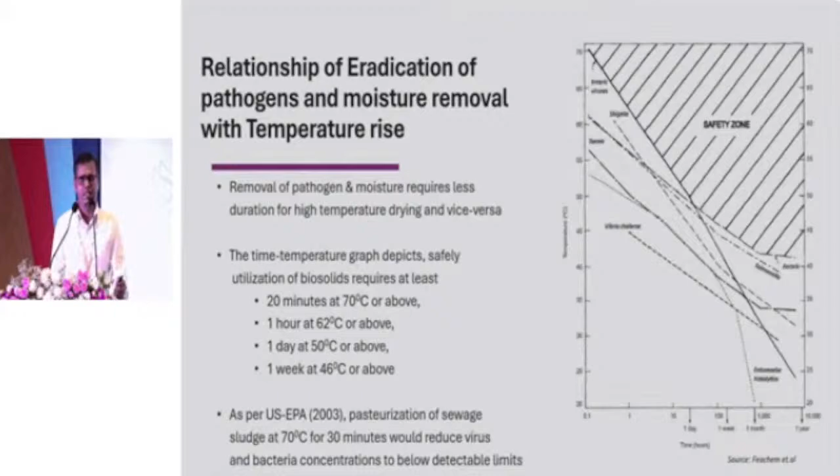Also, the eradication of pathogens and moisture content depends on two factors: temperature and duration, and these two factors are inversely proportional to each other. If the temperature rises, the drying time will be reduced, and vice versa. If the inside temperature is about 70 degrees centigrade, it will take only 20 minutes to eradicate the pathogens. If the temperature inside the greenhouse dryer is above 46 degrees centigrade, it will take 1 week to eradicate the pathogens. As per US EPA norms, if the temperature is 70 degrees centigrade, it will require 30 minutes to eradicate the pathogens from the sewage sludge.

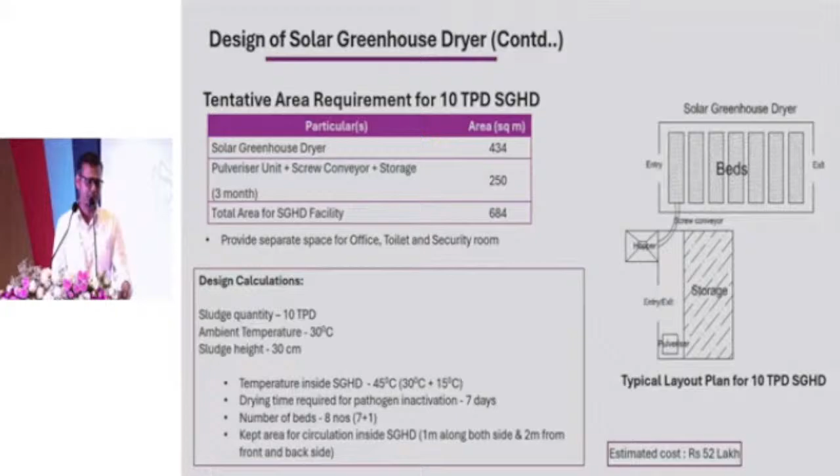Then we have calculated the tentative area required for the 10 TPD plant, considering 30 centimeter sludge height inside the drying greenhouse dryer and 45 degree temperature inside it. It will take 7 days to dry, so we consider 7 plus 1 beds, total 8 beds, and the approximate area required is 434 square meters, with an approximate cost of 52 lakhs.

Operation and maintenance is also very important to get maximum efficiency from the solar greenhouse dryer. The height of the sludge inside shall not exceed 30 centimeters, and sludge turning shall be done at least once every 1 to 2 days, carried out during early morning or late evening. Also, clean the polycarbonate sheets at least 2 to 3 times a month with water and a soft cloth. Never rub it when it is dry.

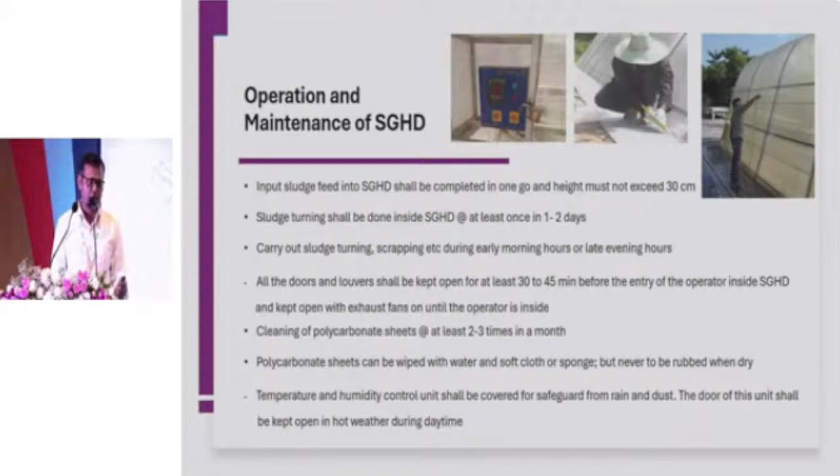Finally, the dried biosolids can be utilized as a soil supplement or soil enhancer because it has high nutrients and increases the voids ratio in the soil. We can get the quality of that dried biosolid as per the EPA specification of Class A, so it can be utilized for gardening and agriculture purposes as well.

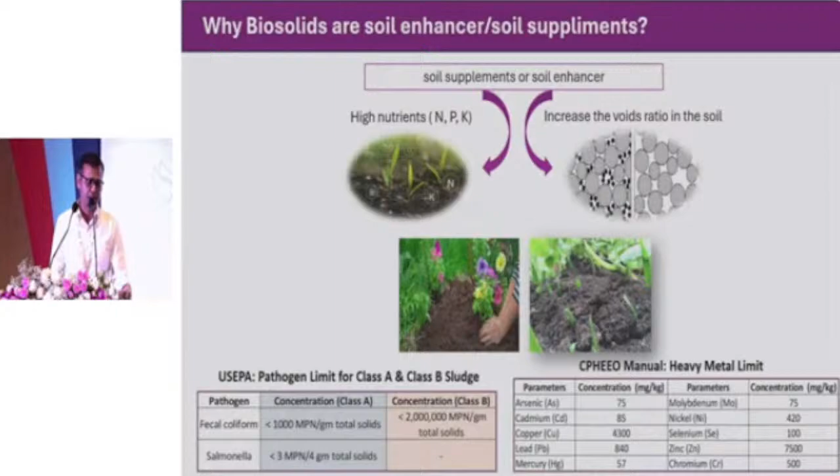This advisory is already ready to share with UTs and states to get suggestions and comments from them to further enhance this advisory. Thank you very much.

Thank you, Sanjay ji. The idea of this advisory came because we came across one CSC study where most of the compost plants, and even fecal sludge, were not being taken or preferred by people because moisture content was very high, 40%, 50%, and pathogens were also there. So in spite of all treatment, rather than using it in the field, it was being dumped, and all efforts on treatment were not fetching any fruitful result.

Through this process, we have tried something new. As you are all aware, in case of compost, if kept for 3 to 4 weeks at a temperature ranging between 45 to 55 degrees, that inactivates all pathogens. Here we have studied that if this temperature is artificially raised to 65, 70 degrees, the time for inactivation of pathogens reduces to 1 hour, 2 hours. So it expedited the whole process.

We are going to release it for comments from the states, and after their valuable suggestions we will improve it, and then provide it further to states for use. So this was our presentation.

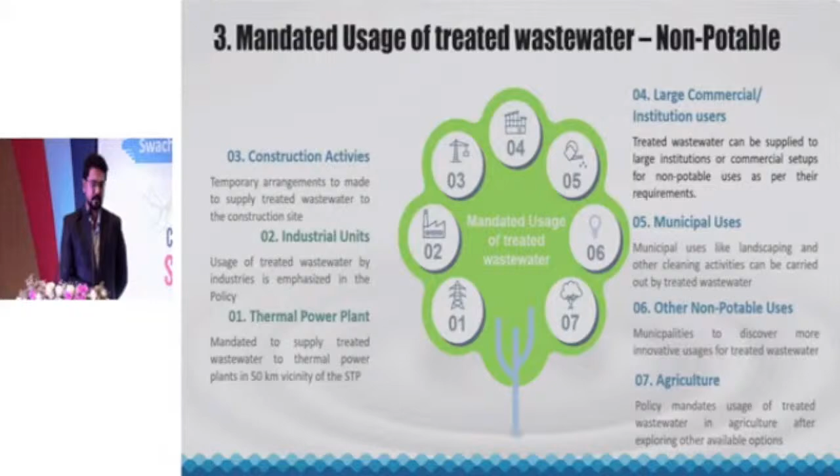I have taken two case studies here. One is Surat Municipal Corporation - they already have 3 operational reuse projects generating 12.5 crore per month revenue. Another is Gandhidham Anjar Nagar Palika, where the capex was borne by Welspun India Private Limited, who are also operating it, and out of all the revenue generated, they share 37 lakh per month with the Nagar Palika. These are the two case studies I've presented here.

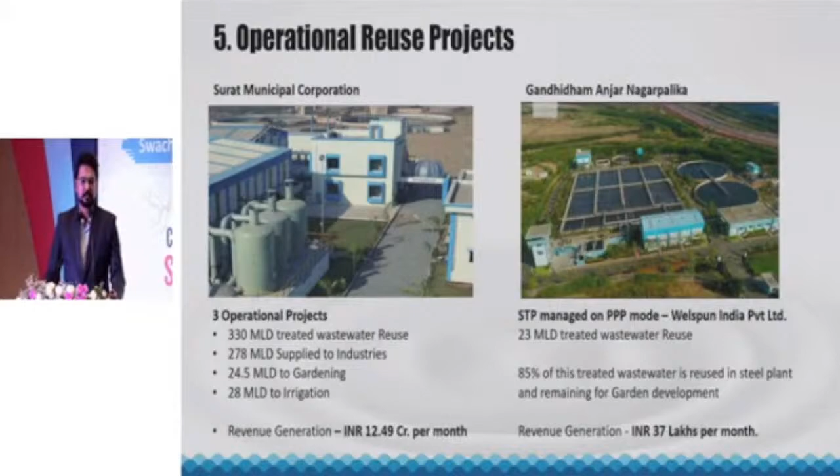If it can be possible in one Nagar Palika, it can be done in other Nagar Palikas also. Keeping that in mind, there are 159 Nagar Palikas in Gujarat. So we have formulated one RFP where we will hire an agency to identify projects and create a master plan for identification of these treated wastewater projects.

So quickly, this will be their scope. Starting whenever they're onboarded, they will do a needs assessment and planning. There will be infrastructure evaluation - the age of the infrastructure, the age of the STP right now, how long it will be operational, considering the life cycle. Then they'll carry out technical studies - for example, what parameters does an industry need water for. Then there will be financial analysis, which is a major part.

Right now, in absence of this agency, we have received almost 20 odd DPRs prepared by Nagar Palikas themselves for reuse. GUDM mandated that all Nagar Palikas submit one DPR each for their existing STPs. But one thing missing was the financial analysis. We wanted those projects to generate some revenue so it can at least bear the cost of operation and maintenance of the asset. So financial analysis is one of the major scopes we've given to the agency.

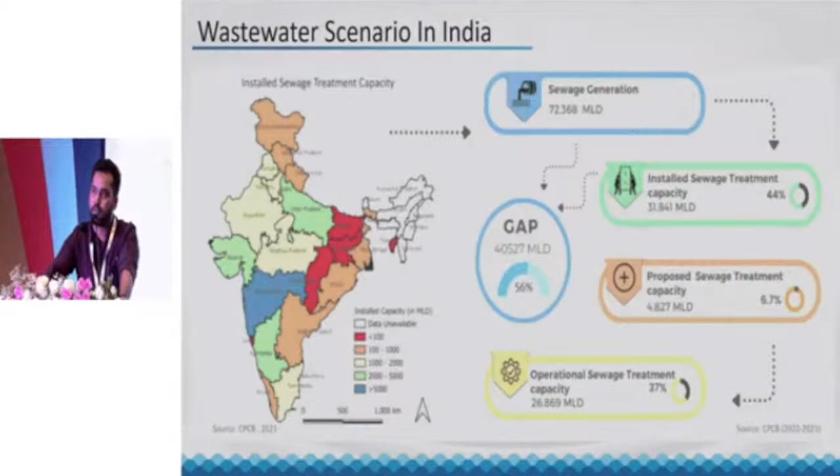So very quickly, if we see the current wastewater scenario in India as per the CPCB 2021 report, sewage generation in the urban context is 72,368 MLD. And if we see the installed sewage treatment capacity, it is close to 32,000 MLD, and out of that, operational sewage treatment capacity is 26. So there's a clear gap still between the sewage generation and the sewage treatment that is happening.

Over the years, various policies and institutional frameworks have been developed to scale up these reuse initiatives. Very latest, we have the 2022 National Framework on Safe Reuse of Treated Wastewater, released by NMCG, in which all aspects of how to scale up reuse in terms of prioritization, stakeholder mapping, financing, and everything has been mentioned, which can act as a guide for states and ULBs to promote this reuse initiative.

And in this, a national target has also been set up. So where STPs are operational, 50% of that water is to be collected, treated, and reused by 2025, and 100% by 2030. And where STPs are not operational or do not exist, it is 50% by 2035 and 100% by 2040.

So, because of all these policies and everything we've been hearing all day, this is also available.

Due to time constraint, I'm directly jumping to the CSE study and the methodology we adopted. We conducted this study in 7 states of India, selected where significant case studies could be found. The study analyzes not only national level policies and programs, but how states have their own policies and how they are faring in implementing projects on ground for reuse of treated wastewater. This study concentrates only on treated wastewater from centralized treatment facilities. The analysis, findings, and recommendations are based on assessment of 35 case studies collected from 16 cities across 7 states in northern and southern India.

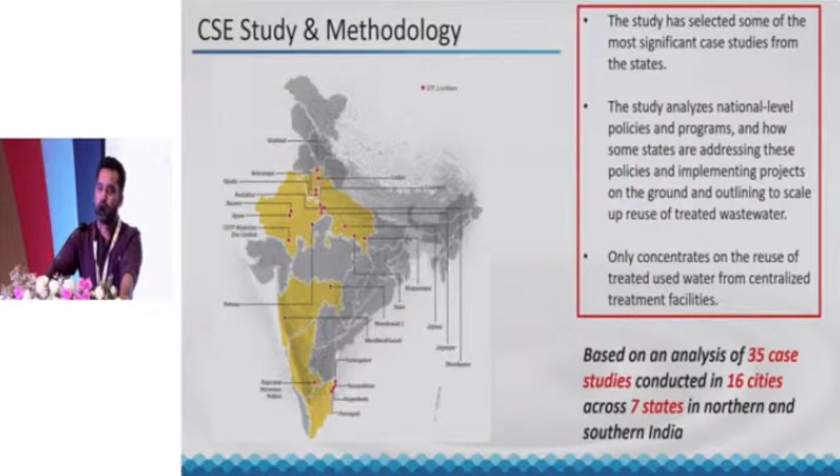The key highlights: for all the states we visited, we mapped the number of STPs they have, the total amount of wastewater generated in every state, and most importantly, the percentage of treated wastewater being reused. Haryana is 15%, 49% in Delhi, 29% in Rajasthan, 43% in Karnataka, 17% in Tamil Nadu, and 17% in Maharashtra. Delhi shows higher numbers just because 265 MGD of treated wastewater Delhi has to discharge into the Yamuna as per the mandate of the Honorable Supreme Court of India, so they are also counting that as reuse, hence the number is high in Delhi.

In all the states, the major reuse happening sector-wise: agriculture leads at 40%, followed by lake revival or rejuvenation at 26%, and then industry at 20%.

Some key highlights from the states: Haryana is faring good, with an integrated water resource action plan having a complete detailed plan from 2023 to 2025. These plans are continuously monitored month by month for every block and district, tracking interventions and task completion.

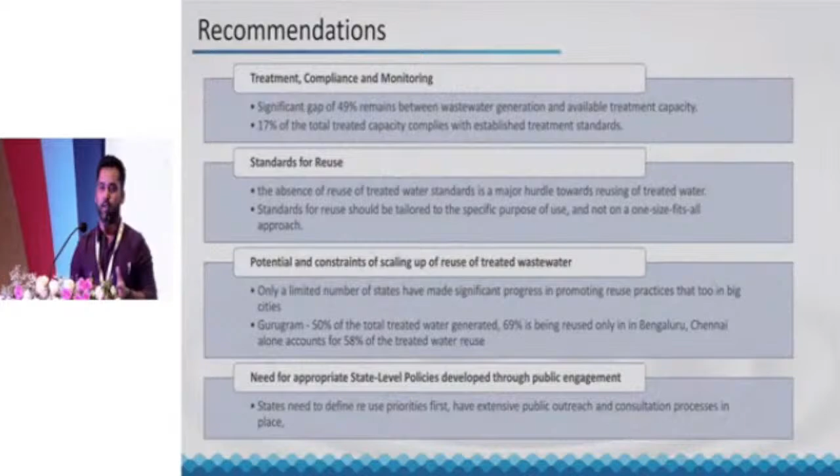It is not equitably distributed across the states, be it Haryana, Karnataka, or Rajasthan - we've seen this across all states. So the recommendation is that still only 17% of the total treatment capacity complies with the established standards.

Infrastructure revival in terms of how each STP is complying with the treatment standard for reuse. As of now, absence of a reuse standard is a major hurdle towards reusing treated water. And the standard of reuse should be tailored to a specific purpose, not a one-size-fits-all solution.

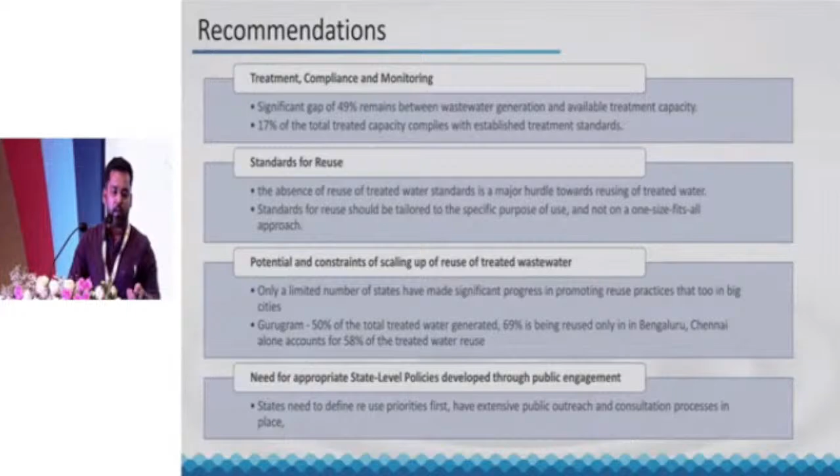Only a limited number of states had made significant progress. For instance, in Haryana, Gurugram alone generates and reuses 50% of the total wastewater. And in Karnataka, 69% alone is used only in Bengaluru.

There is a need for state level policies developed through public engagement. Wherever we have a reuse policy in a state, a dedicated timeline and action plan needs to be there for monitoring the progress of the project. And an effective governance model is needed.

Still, many states, when we discuss with stakeholders, lack proper stakeholder mapping, and the roles need to be defined properly - who will look into what in terms of reuse initiatives.

Local treatment and local reuse should be prioritized. There are many states where we visited and found huge STPs of 300, 200 MLD, but the demand centers nearby are missing where they can reuse this water. So they are left with the only option of conveying the water 100 to 150 kilometers to make the reuse happen. So we have to prioritize local treatment and local reuse.

Regarding CSE's role, we have been working in different areas of reuse. We are going to launch a report next month called Waste to Worth, Managing India's Urban Water Crisis. We are also working in Uttar Pradesh, preparing a guidance note for prioritization on reuse of treated wastewater. And we recently released our city level template for reuse of treated wastewater, which was released at Ganga Utsav. So this is CSE's work in reuse of treated wastewater.